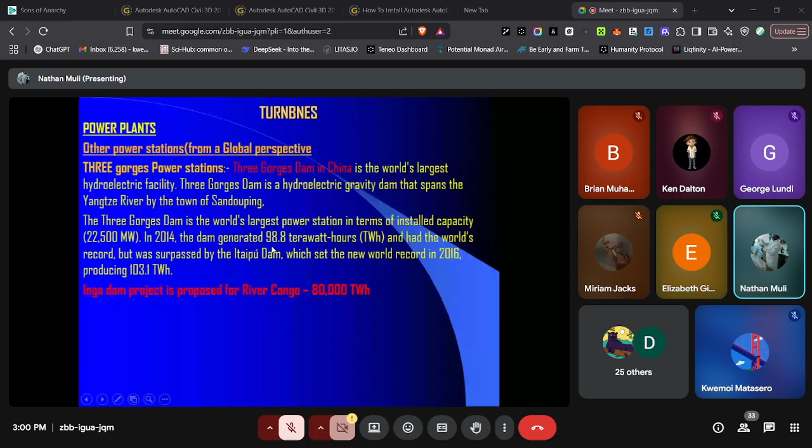...of East and Central Africa with power, because the Congo River is one of the rivers with quite a large amount of water. So these are some of them from a global perspective. The United States has got its own, but I think they consume their power locally. They don't export to any country.

In Kenya, we have been saying that we do not have enough, but I believe if we put our heads together and decide to produce enough power to run our industries, we still have that kind of capacity, because I've told you, Mutonga has never been touched, and others have never been touched. And again, look at the number of years where Sondu Miriu was never thought of because of politics, yet it is one of the best river runoff systems that we have in East and Central Africa.

Much of southern Africa depends on what comes from rivers being shared by Zambia, Botswana, Malawi. I think they also use the same, and partly Mozambique. I think most of those countries rely on Kariba Dam for their power supply, and let me hope it is sufficient. I do suspect South Africa has a nuclear power plant.

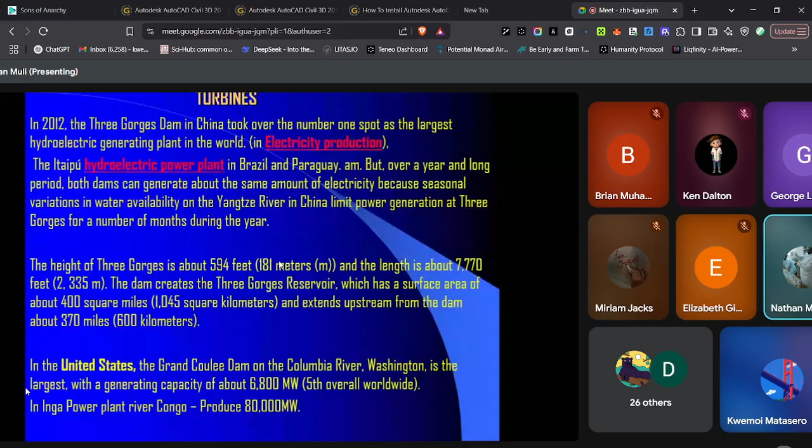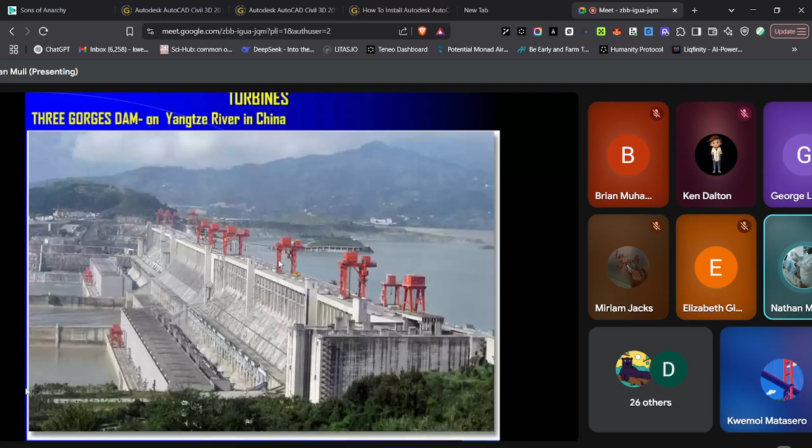So this is the Three Gorges Dam in China, said to be one of the biggest. But I said Itaipu seems to be running it a close second if it is not becoming the first. And Inga Dam is also coming up on River Congo. Otherwise, I said the advantages of this are that the operating costs are very low. You have very few workers and engineers required to run the plant. And the plant can be very clean and very neat.

And there is no smoke or soot, because apart from the noise coming from the turbines, everything else looks very okay, because you are using water which is running back to the river. You can also meet the requirements of changing loads without any loss of efficiency with this type of plant. And the efficiency does not change with time, unlike other types of plants.

And no fuel is required for this. You don't need any fuel at all, unless you need fuel for other things, or maybe you need to lubricate. So lubricants are not fuels. You need to lubricate some of the running parts outside of the turbines. There are no standby losses, I can say that. Otherwise, land can also be cheaply available.

I hope that is what they did in Nyakach, where Sondu Miriu stands. They had a lot of politics when it was coming up. Politicians told the community that they were given peanuts for compensation, and they almost refused that the project should take off. But they gave back to the community by building them a school. They also built them a library, which they hardly use. They also gave them free water.

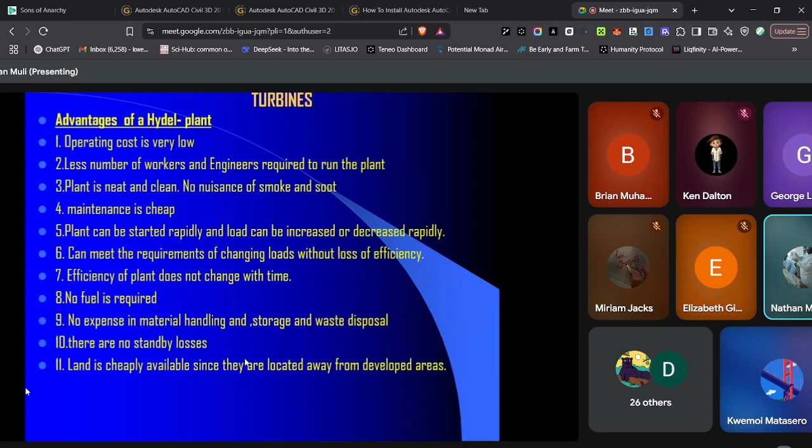What are the disadvantages of hydro plants? We said the initial cost is very high, and availability of power is not very reliable. Since this depends on the quantity of water, what would happen if there's a drought? And it depends on rainfall.

And that's when you find people now resort to rationing. You allow water to rise up to a certain level before you can start generating power. I think it is almost the same thing which happens with Turkwel. Turkwel, they wait because Turkwel River doesn't have a lot of water. They wait for the levels to rise up so that they can start generating.

Turkwel was also supposed to be multi-purpose because it was supposed to remove cattle rustlers from rustling so that they can engage themselves in useful agricultural activities. But I think nobody sensitized them on that. And that's why you find that the issue of banditry still rings out, even long after Turkwel was completed, sometime in 1992. Okay? Otherwise, it is one of the engineering masterpieces that you can ever come across.

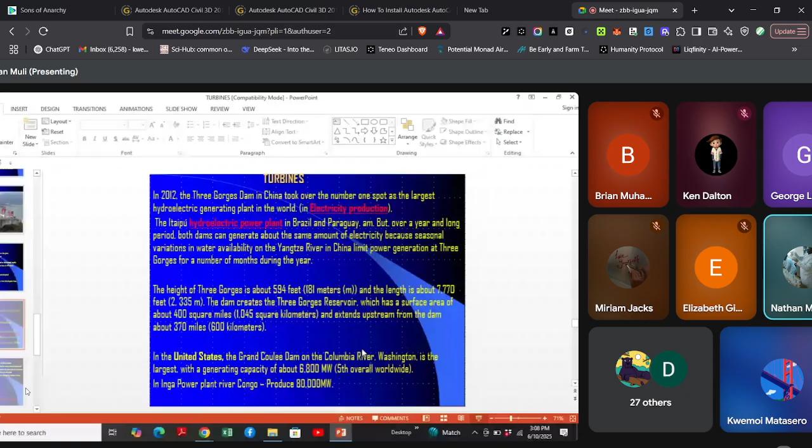These have a dam across the river, okay, where you can impound the water. And once you impound the water, you can generate power as per the requirements that you have. Otherwise, they can run 24/7 without stopping, except in the few small instances where you have to stop to check one or two things. Okay?

Otherwise, we have medium head plants, where 30 to 500 meters of head must be available, with a penstock provided also to take water to the turbines. Okay? Otherwise, at all times, we normally say with 200 to 400 meters as low and medium head, we can be able to generate power.

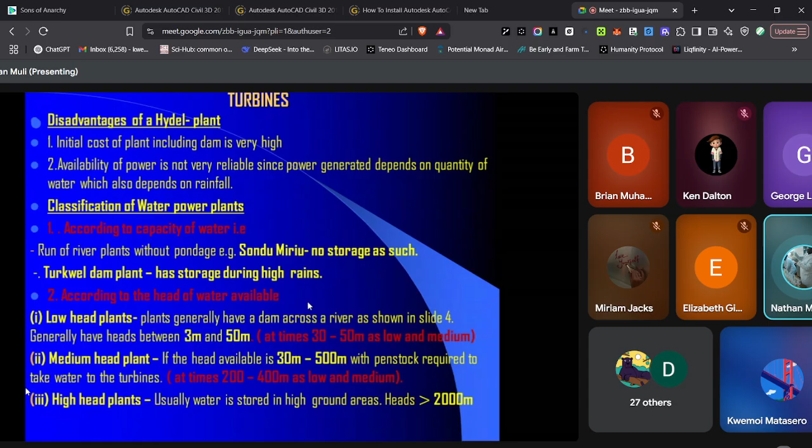Otherwise, we have high head plants where water is stored in a very high ground. Okay? And these ones you find the head is exceeding 2,000 meters. 2,000 meters for you to generate power. Then what kind of a turbine would you require? We shall get to that.

Okay? So we have said for a site to qualify for layout of a power plant, water must be available. That is number one, meaning you have to have a look at the rainfall records to determine the reliability of the rainfall. There must be facilities to store water, meaning there must be sufficient space and conditions that are essential for water storage. Then the head available, how high is the reservoir located?

Can it provide enough conditions to run the turbines, and what type of turbines can be run? Otherwise, we mind about the load center, where the plant should be situated where power is to be used. We don't do that in Kenya. We generate power around Gitaru because everything is sent to Gitaru.

From Gitaru, we raise it to 132 kV, transport it to Nairobi. At Juja, we step it down to 66. Then at Ruaraka, we bring it down to 33 when we start sharing it out to the industries. Okay? That is what we normally do in Kenya. No wonder you find the Jinja line. I don't know whether the Jinja line still supplies us. It is still running, but all the power is brought to Nairobi, maybe with the exception of what comes out from Kipevu. And then from Nairobi, it is now distributed to various parts of the country.

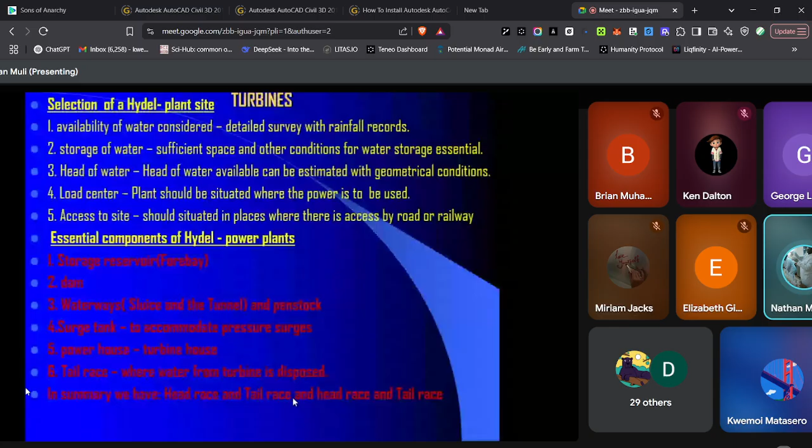What are the essential components? Then you may have a dam, if not just an impoundment like we have in Sondu Miriu. Then you may have to provide a surge tank so that you can be able to accommodate surge pressure. When you stop or when you are starting the turbine, you need water available, and you need also to dampen the waves that are generated when you stop the turbine suddenly, or in case there's power failure, or for some reason the thing comes to a stop.

There has to be something to accommodate the backlash due to incompressibility of water, because it sends a wave back with a celerity faster than the speed of sound. And that has to be arrested, because with a mass oscillation being created, the surge tank should be in place to absorb all that. There has to be a powerhouse where you put in your turbine and other accessories, and then we have the tail race, like I've said, where water from the turbine is disposed of.

The point where you dispose of that water, it goes back to the river. That channel, we call it a tail race. And that's why I told you in Sondu Miriu they became clever. They decided to use the waters of the tail race to produce 20 megawatts. They gave it to the Chinese, and they have actually made it possible to generate 20 megawatts out of the waters of the tail race. Okay, they call it Sang'oro.

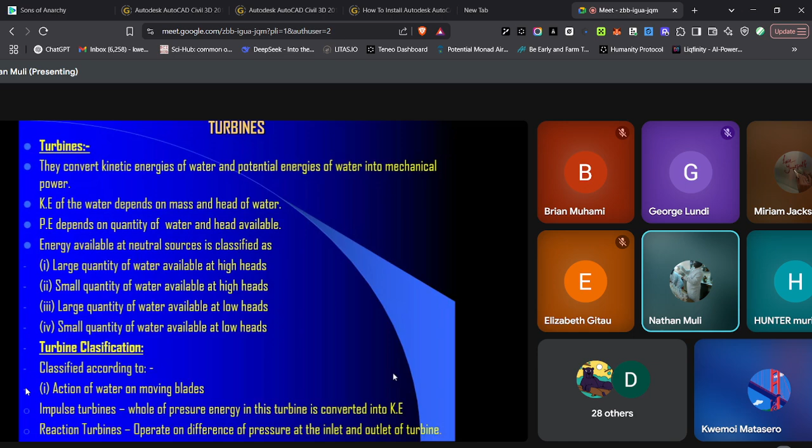What of reaction turbines? These ones operate on the difference of pressure at the inlet and outlet of the turbine. They are a special case because they are some of the most efficient and most widely used types of turbines. We'll be able to see that as we move along.

Turbines, though they can be classified on the basis of action of water on the blades as impulse or reaction turbines, can also be named or classified in accordance with the name of the originator of the type of turbine.

Number one, we have what we call the Pelton wheel turbine. This one was invented by engineer Lester Pelton. He came up with one of the best turbines that you can ever think of.

Then we have what we call the Francis turbine. The inventor of this was Francis, and it is one of the most efficient turbines that you can come across.

Then you have the Kaplan turbine. This was invented by Victor Kaplan, not Victor Desmond, but Victor Kaplan, from Austria. In fact, when I went to the Technical University of Vienna, I went to their Hall of Fame and wanted to see where they placed the name of Victor Kaplan, who gave the world one of the best and most efficient turbines you can ever come across.

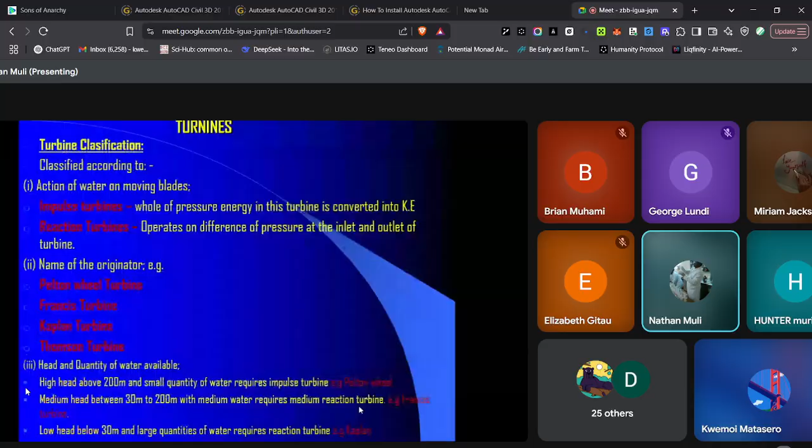Still on the classification of turbines, we can classify them on the basis of the disposition of the shaft. Turbines either have horizontal or vertical shafts. But speaking generally, it is the Pelton wheel turbines that have horizontal shafts, while the Francis and Kaplan turbines have vertical shafts. So that is another mode of classification, on the basis of disposition of the shaft.

Now, we can also classify them depending on the direction of flow of water in the runner. We'll have to dissect a turbine so that we can tell ourselves what the runner is and what the vanes are.

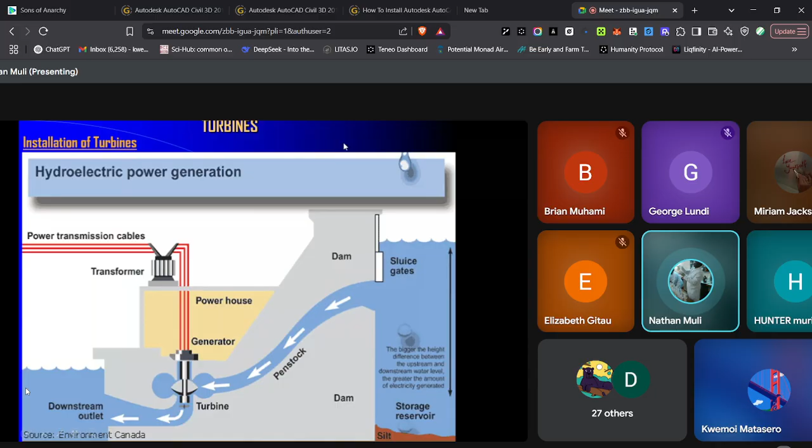So we can classify as in a power plant. Through the dam, you have the penstock, an arrangement. Then you have the turbines, which release water back to the downstream. And because it has a vertical shaft, it could be a Francis or a Kaplan. The vertical shaft is linked to the generator so that to produce power, you step it up to a grid and distribute it wherever required.

Here we have the various types of turbines based on the originator. We have the Pelton wheel, we have the Francis, and we have the Kaplan. You can see from the vertical shaft in the first diagram - is it a Francis or is it a Kaplan turbine? It is more like a Kaplan than a Francis turbine.

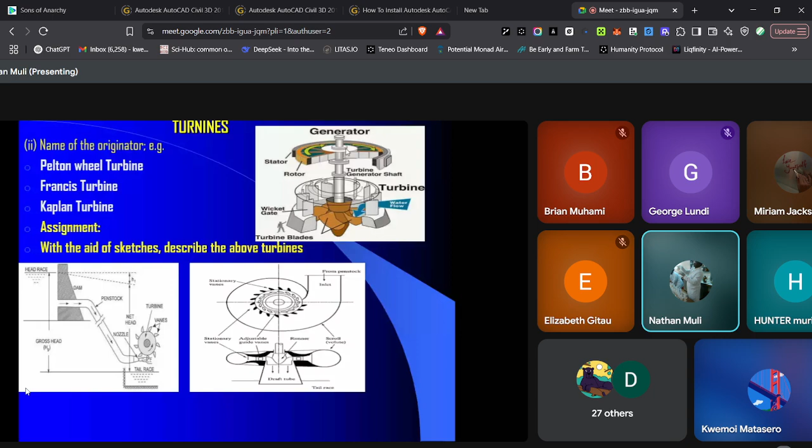I think the best thing we can do, or the fairest thing, about these turbines is, especially for clarity... let me see. Especially for clarity, am I doing the right thing? Yeah, let me do the right thing.

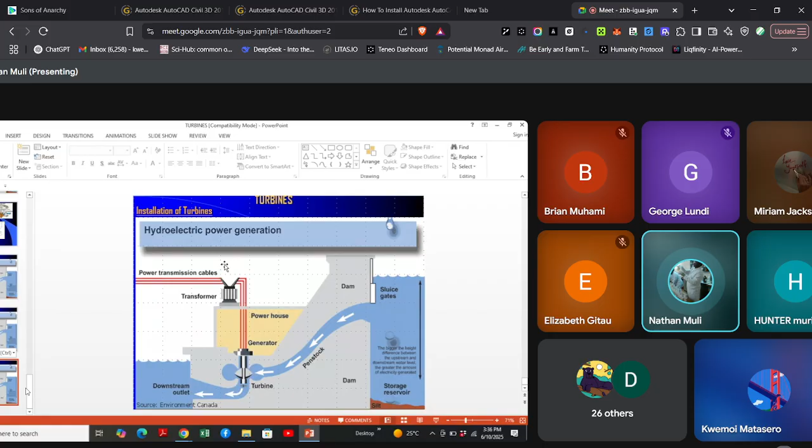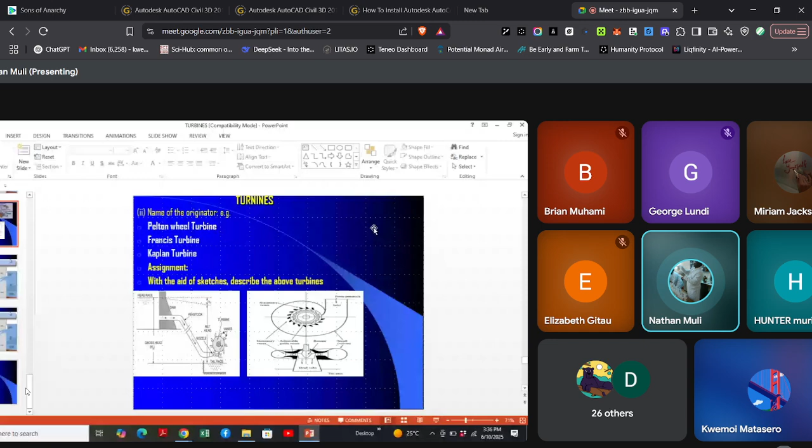What I mean is that I'll remove this and bring one of these here. I'll bring one of this, which I've said is more of a Kaplan. It is more of a Kaplan turbine than another.

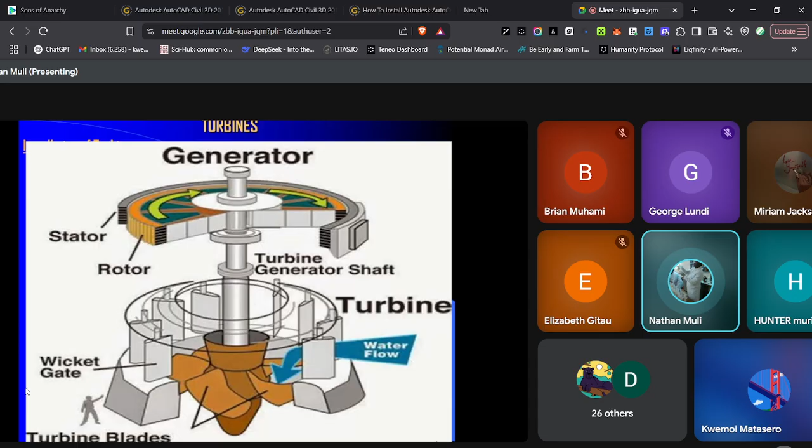Let's say there we are. I believe this is a Kaplan turbine with its vertical shaft. That's what I wanted you to see - the stator, the rotor, the turbine generator, and the water flowing in, the wicket gates, which are several, and the turbine blades. This is actually a Kaplan turbine.

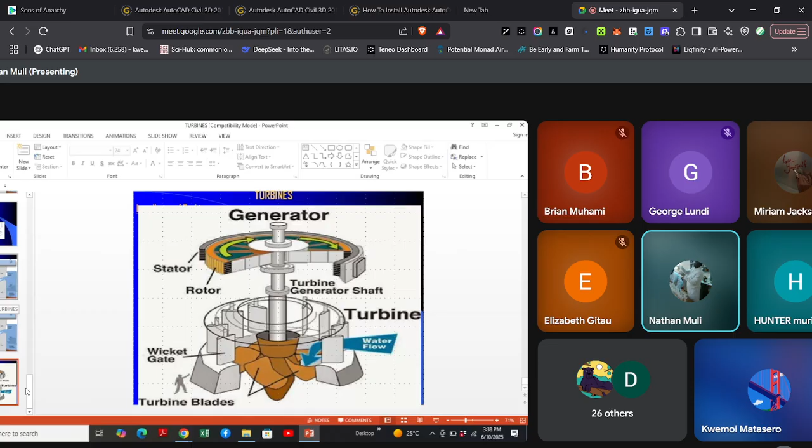Then after we have seen that in that version, let me see whether I can create space for another one. And which is this other one? Let me have the layout for the Pelton wheel. I think I should have deleted this. Let me cut it so we can have it here.

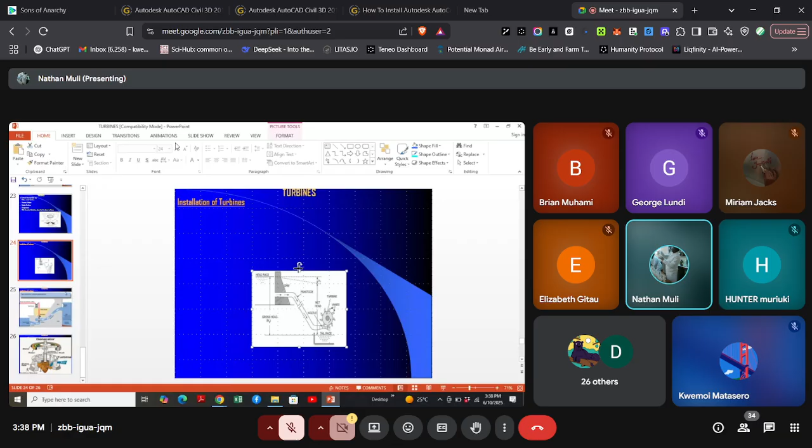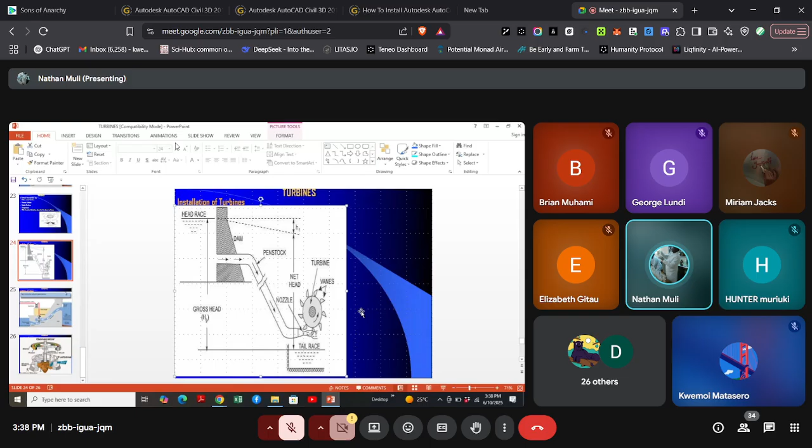Okay, I can have it here, blow it up so that you don't miss out on this. You should be able to see this clearly with all the details - where you can be able to see the penstock, the head, the dam, the penstock, the head, the nozzle, the tail race, the turbines, and the vanes, and gross head available.

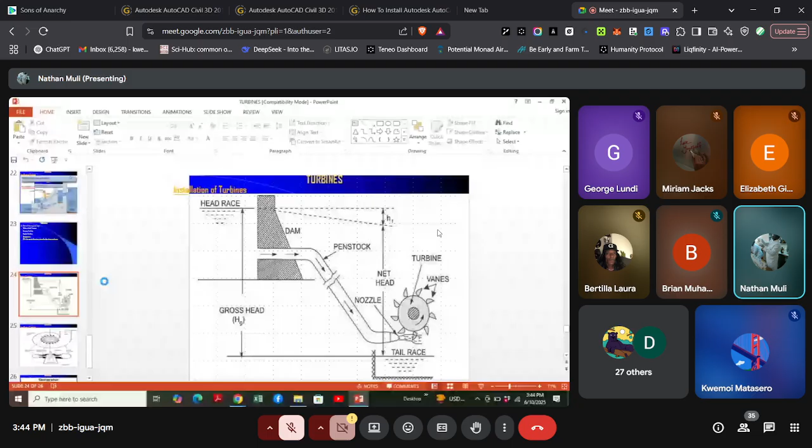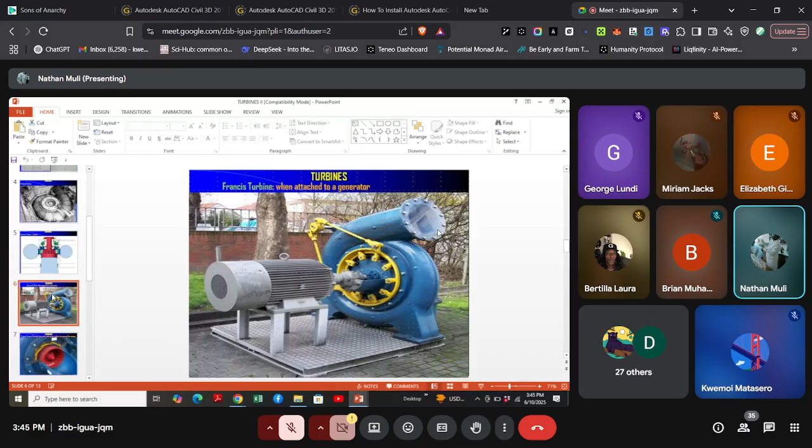I don't know why I'm starting with this turbine 2, because I would that I start with the Pelton wheel turbine. Let me see whether I have it in isolation. Yes, so let me start from here. Much of this you have seen in the preamble about the layout, about the plants and their classifications and all that. And then we talk about the Pelton wheel.

The Pelton wheel, I told you, is an impulse turbine, and this was by engineer Lester Pelton, 1800s. These type of turbines operate under very high head, up to 1,800 meters. But the beauty of them is that they require small quantities of water compared to the others. Such that from the head race in the mountains, water is conveyed to the turbines in the powerhouse through the penstock.

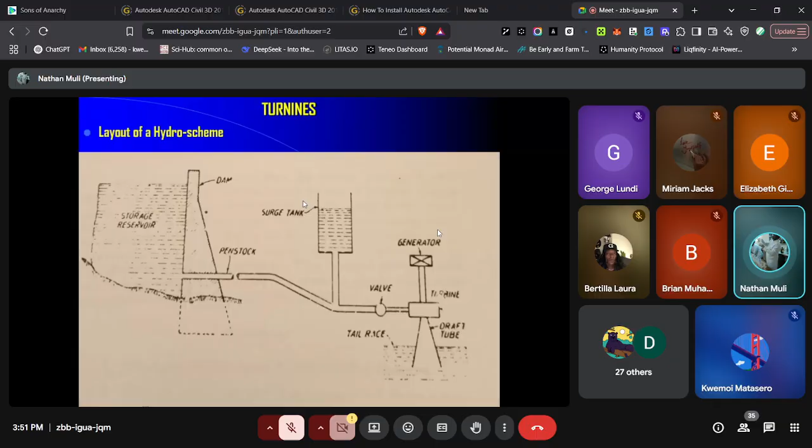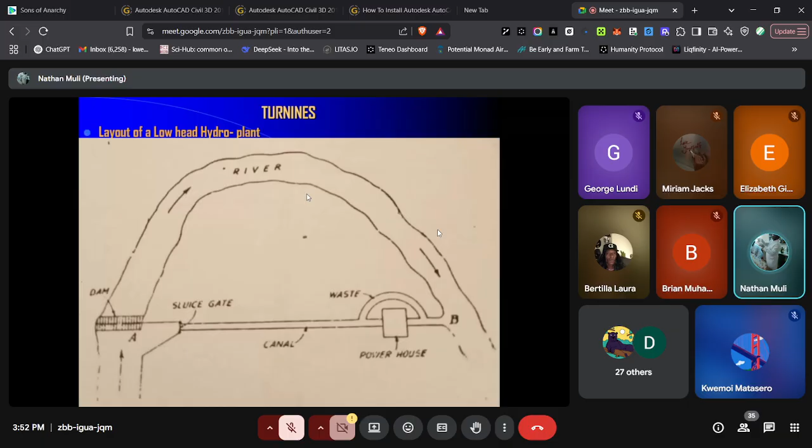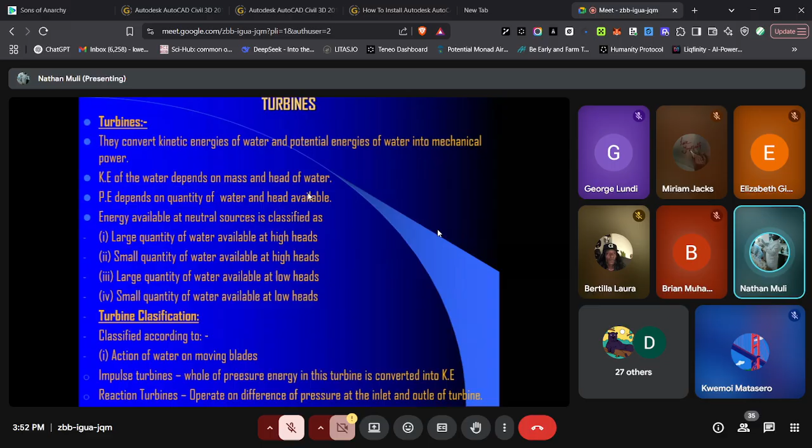The nozzle is also coupled with a rod spear, to make sure that you create a jet which will impinge on the buckets. Once they impinge on the buckets, then you can be able to rotate the buckets, or rather you can be able to rotate the runner, which in other words, we can say it is its impeller, but we will not use the word impeller in this case, like in the case of pumps. We are going to use the term runner for the turbines. Okay?

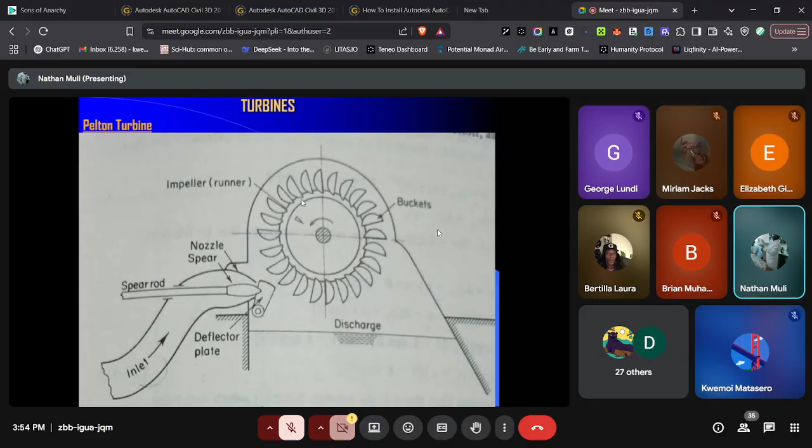The buckets are shaped in a manner that water will enter tangentially in the middle and discharge backwards and flow again tangentially in both directions. And by so doing, you can avoid thrust on the wheel. In this case, you find that the jets are deflected by an angle of 160 degrees.

And now you can see the placing of the runner, the buckets, and the casing to avoid the splashing of water. You can see the jet with a deflector, and you can see the spear. Of course, the spear has a spear rod. As the jet impinges on the buckets, water flows and joins the tail race as it goes down back to the river.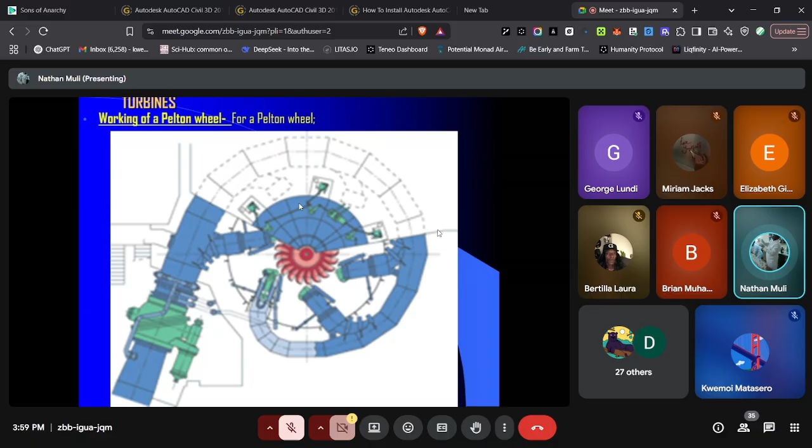Now to have a look at the functions of the nozzle. The nozzle is one of the major components of a Pelton wheel, and it is placed at the end of the penstock. It is here where pressure energy which passes through the penstock, which is a pressure conduit, is converted into kinetic energy, and it is further increased by provision of the nozzle. Yes. But all that is happening under the influence of atmospheric pressure. Otherwise, water flowing will strike the buckets that are fitted on the periphery of the runner to produce mechanical energy.

When it comes to operation of small turbines, a single jet is ideal. But for a large turbine, you may require a number of jets to run the wheel. Okay? So water will strike the buckets fitted on the periphery of the runner, and that way you produce mechanical energy, which after rotating the shaft should be able to produce electric energy.

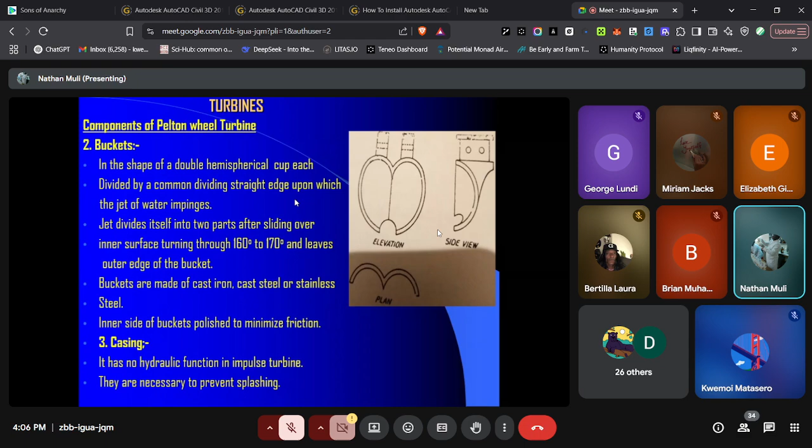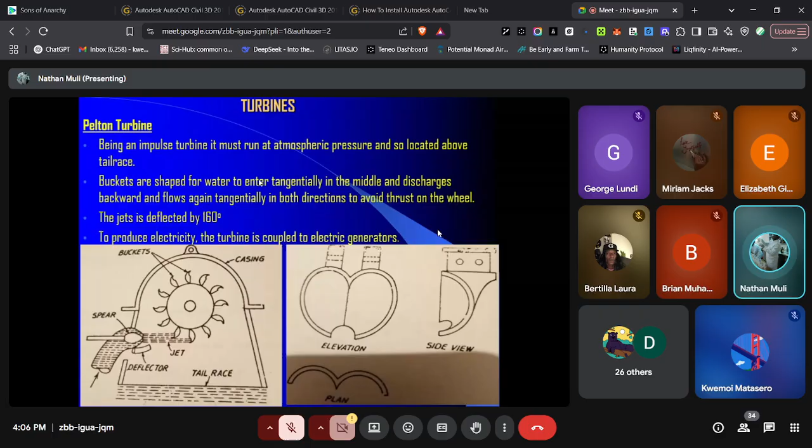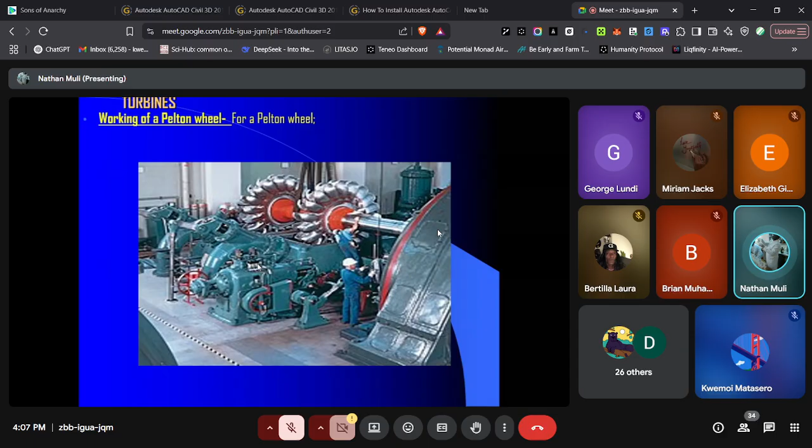You should be able to place back the cover so that the turbine wheel or runner can move with ease and without splashing water. Number 4 component after the casing is what we call a hydraulic brake. Its use is to ensure that we can stop the running of the turbine, because even long after you have stopped supplying water to impinge on the cups, the turbine will continue running.

And what is it running against? You have to be very careful, and that's why we have to stop it, because someone could be working on the other side while it is running, generating power. That's why we have a brake to stop that kind of movement. So the brake nozzle will issue in a direction opposite to that of the rotation so that we can stop the running of the runner or the wheel.

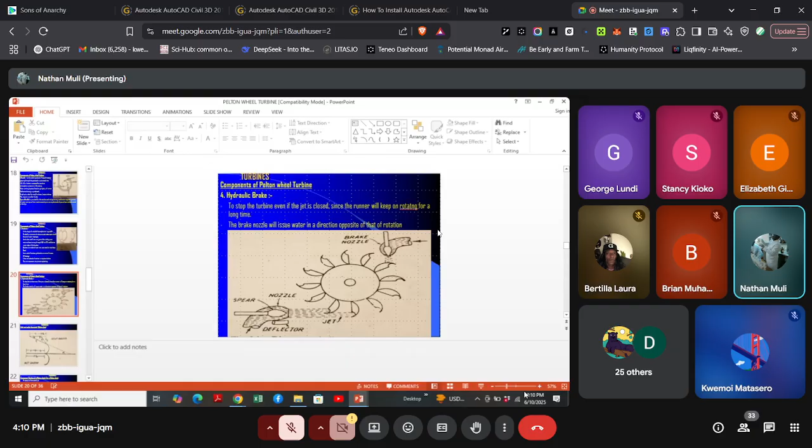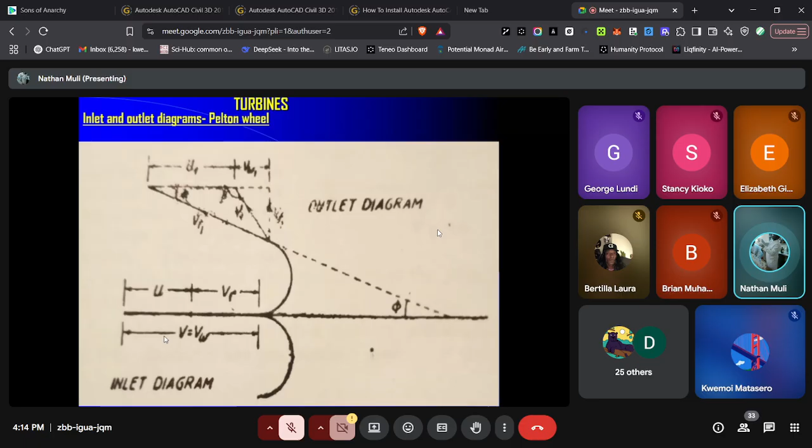Then U1 is the peripheral velocity at outlet, so that U1 will be equal to U, since the inlet and outlet tips of the buckets are the same distance from the center of the shaft. That is what we are saying when you look at that diagram. Let me believe you are very comfortable with this. It is simpler than what we have had before for the pumps.

Otherwise, for the inlet velocity diagram, we say water will enter tangentially. And therefore, the inlet velocity diagram is simply a straight line. And that's why they differ from what happens with centrifugal pumps. Okay? Alpha equals 0 in that case, and theta equals 0.

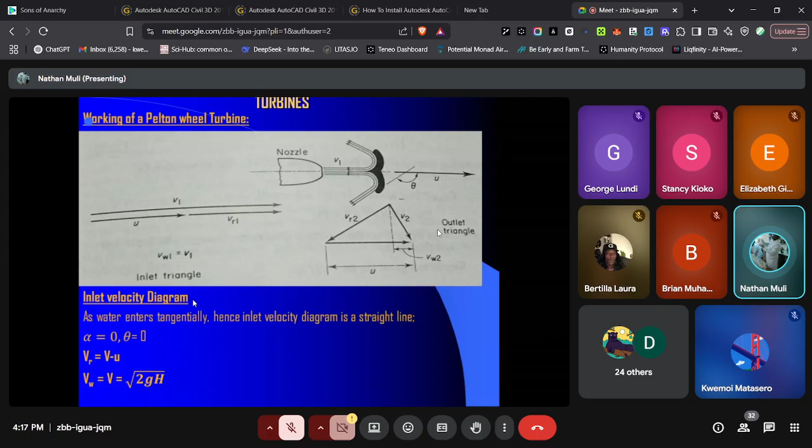While VR equals V minus U, and VW equals V, which equals the square root of 2gH. So simple, unlike the working of the pumps. Well, whatever head is available at the nozzle will be equal to the gross head minus the losses in the pipeline, and this will lead us to V equals Cv times the square root of 2gH. I'm sure you are familiar with that.

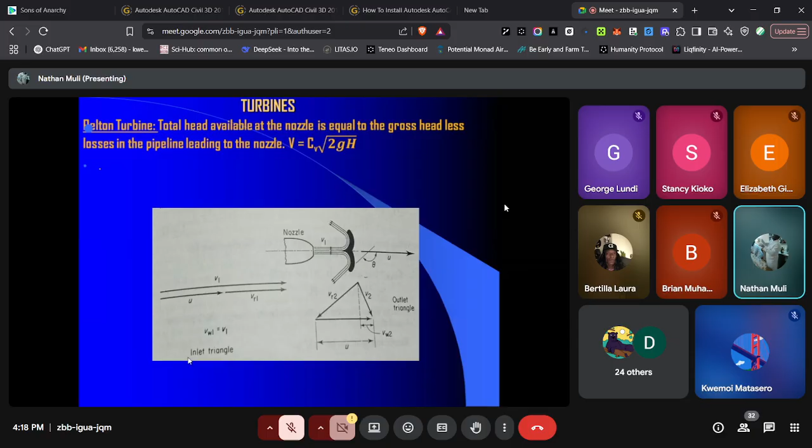Otherwise, looking at the diagrams, the inlet and outlet, what can you see? And that's why I was saying it is simpler than what you are likely to have interpreted when it comes to centrifugal pumps. Okay, having seen that, what is the next thing?

Referring to the outlet velocity diagram, we say water will pass over the curved surface of the bucket. And for that reason, VR1 becomes less than VR due to friction losses. Therefore, we can say VR1 equals a constant K times VR. For general purposes, the friction losses are neglected and you take K as unity. Otherwise, VR1 equals VR. And VW1 equals VR1 cos phi minus U.

So what is the amount of work done? This will be equal to U by g into V minus U plus V minus U cos phi. That is the equation which links that. We have VW1 is negative, as already discussed. And the work done by the Pelton wheel will be equal to whirl velocity VW times U by g plus whirl velocity VW1 times U1 by g, and we shall express that per kilogram per second.

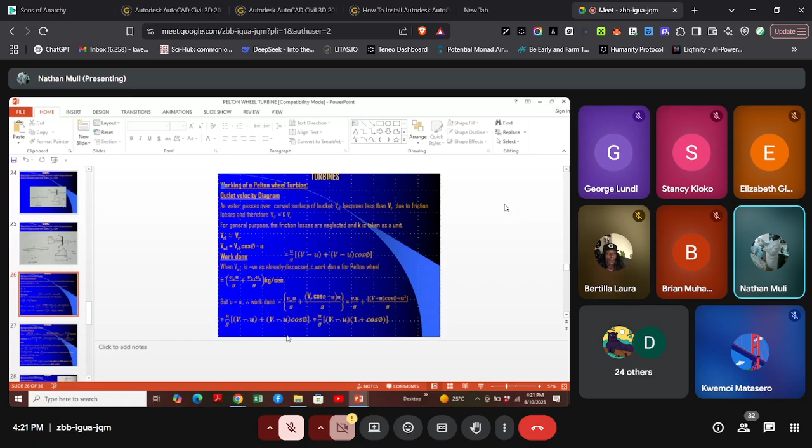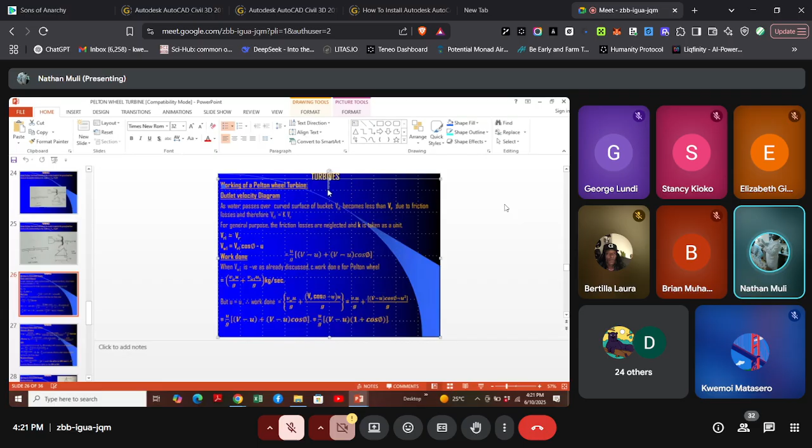But remember capital U. Let me use capital U. We hope I can manipulate this. So capital U equals U. Therefore, work done equals VW U by g plus (VR cos phi minus U) U by g, which equals V U by g plus (V minus U) cos phi minus U squared by g, which equals U by g into (V minus U) plus (V minus U) cos phi. Okay. And that equals U upon g into (V minus U) into (1 plus cos phi).

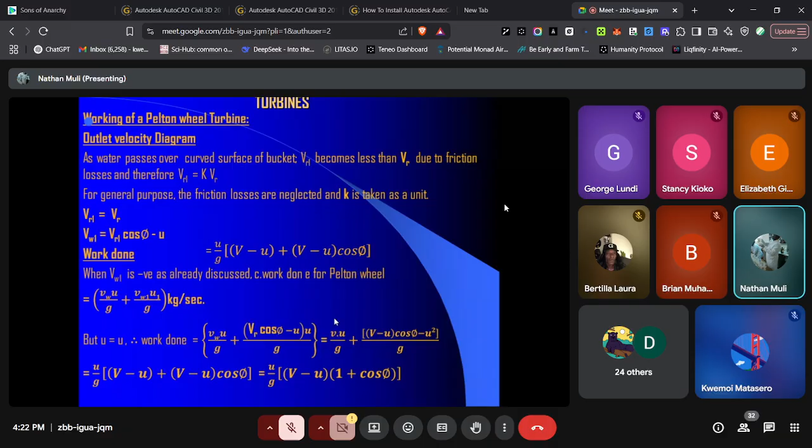From this, we can divide by the kinetic energy of the jet per second. And therefore, hydraulic efficiency, eta H, equals hydraulic output upon hydraulic input at the nozzle base, which equals V squared minus V1 squared by 2g, all that upon H. Therefore, hydraulic efficiency equals U upon g into (V minus U) into (1 plus cos phi) upon V squared by 2g, which equals 2U into (V minus U) into (1 plus cos phi) by V squared. So mechanical efficiency equals shaft horsepower divided by the horsepower of the wheel.